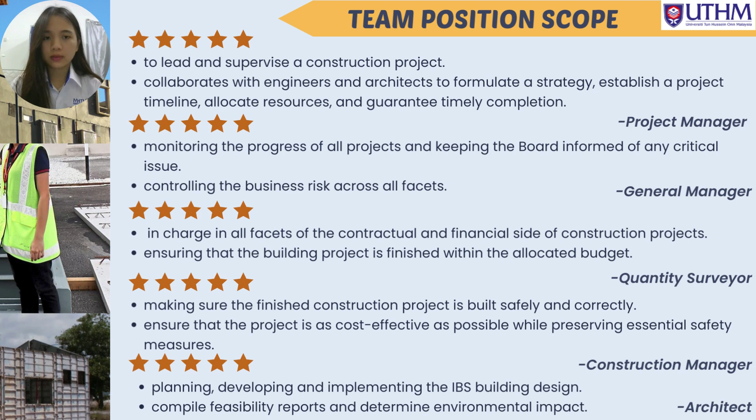He ensures that the building project is finished within the allocated budget. A construction manager makes sure the finished construction project is built safely and correctly, and also ensures that the project is as cost effective as possible while preserving essential safety measures. An architect is used for planning, developing, and implementing the IBS building design.

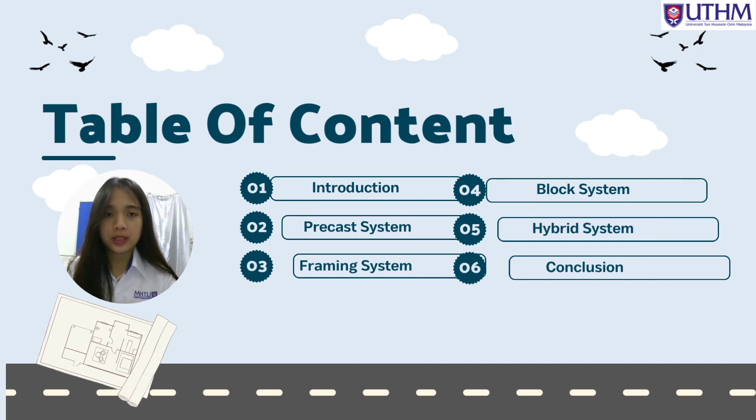For the table of contents: the first one is introduction, second is precast system, third is framing system, fourth is block system, fifth is hybrid system, and the last one is conclusion.

The IBS score is used in the construction industry to measure the level of IBS usage in a building and becomes part of the main monitoring system of the IBS construction industry. The scoring system is made according to the principle of usage of prefabricated and precast components, offsite production of components, use of standardized components, and repeatability and design of building components based on the Malaysian Standard Guide to Modular Coordination in Building, MS1064.

Next, the benefits of IBS adoption in construction activity: to reduce dependency on foreign labor, to improve construction productivity and quality, reduce wasteful construction methods, become more environmentally friendly, achieve design standards, and speed up construction time.

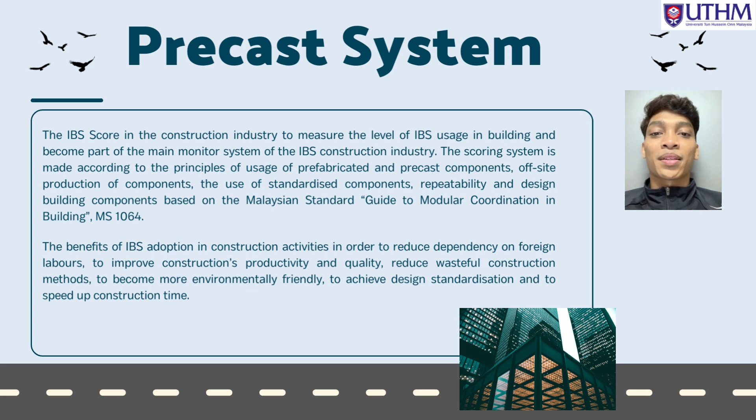Next, I will present about the installation method of the precast system. Number one is design and planning: the first step is to develop detailed design drawings and construction plans for the precast elements. Number two, fabrication: precast elements are manufactured in a precast plant or factory.

The process involves casting concrete into a mold or form, curing, and applying any required finishes or treatments. Number three is site preparation: the construction site needs to be prepared to receive the precast elements. Number four, connection and joining: once the precast elements are in place, they are connected and joined together.

Number five, finishing and sealing: after the precast elements are installed and connected, any necessary finishing touch-ups are applied. Number six, integration and completion: other construction components such as MEP—mechanical, electrical, or plumbing systems—are integrated into the precast structure.

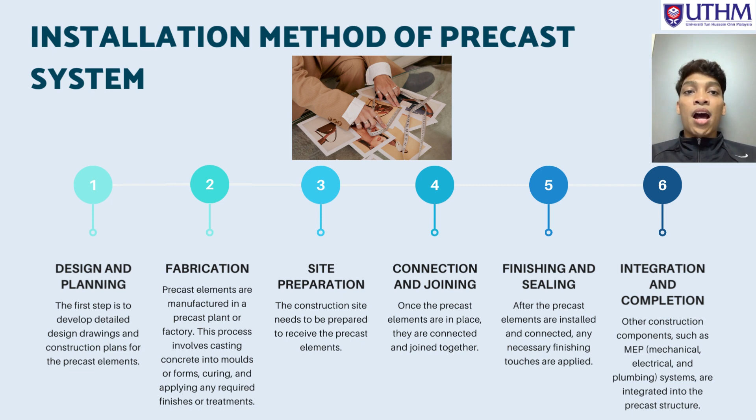Next, I will present about planning, casting, and delivery of the precast system. Number one is planning. Planning is divided into 4 items: number one is design, number two is quantity estimation, number three is scheduling.

Number four is logistics. Next, number two is casting, which is divided into 4 items: number one is mold preparation, number two is reinforcement placement, number three is concrete pouring, and number four is curing.

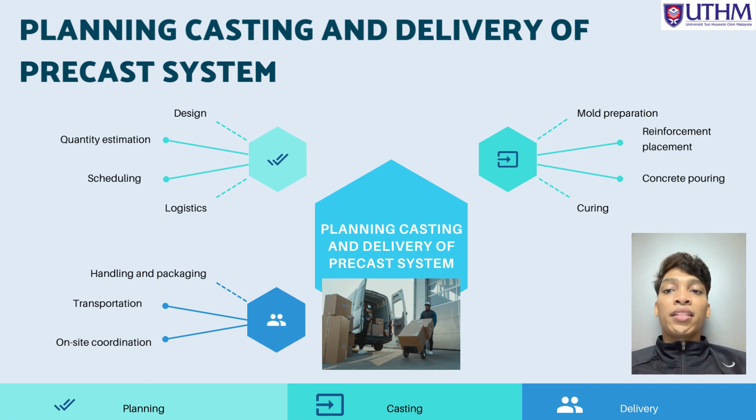Lastly, the delivery. Delivery is divided into 3: number one is handling and packaging, number two is transportation, and number three is on-site coordination.

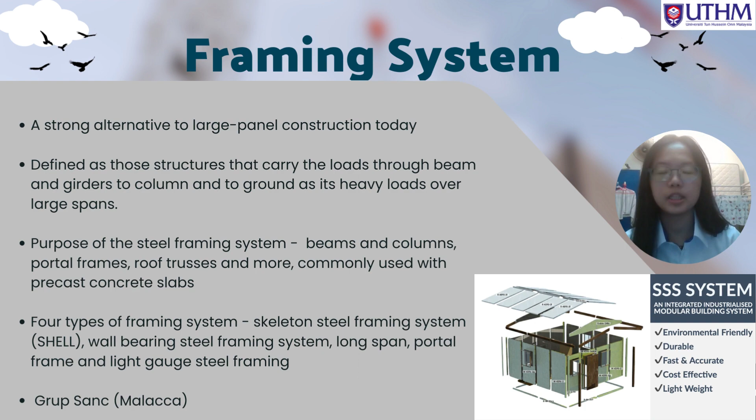The steel framing system consists of columns, beams, and floor components. In Malaysia, construction companies that use the framing system, such as Grup Sanc in Malacca, fully integrate the design and construction concept, adopting the highest standard of building quality by collaborating with international industry pioneers, which is the SSS system.

Now I will explain the installation method of the framing system. The first step is the stock yard - steel is unloaded and stored prior to being moved to the fabrication lines for processing. The second step is shot blasting.

Shot blasting is a process to displace dirt by shooting a strong force of shot onto the metal surface to provide a suitable clean finish for welding. The third step is cutting, such as circular saw, gas or flame cutting, plasma cutting, and lastly drilling and punching.

The fourth step is bending, such as section bending, plate bending, and tube bending. The fifth step is T-splitting - splitting beams to make T-sections using flame cutting. It can be cut centrally, off-center, or flange trim.

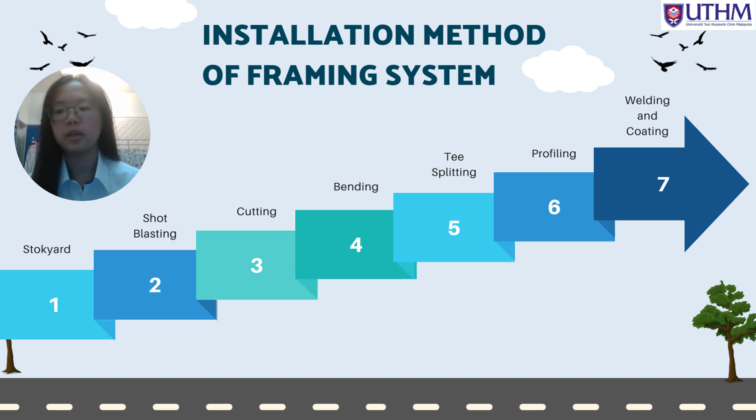Next is profiling - the tubular section may require profile shaping or saddling to fit the contour of the curved surface. The last step is welding and coating, to protect the surface from moisture which can cause it to become brittle.

And reduce its strength. Here's a table that shows the details of the installation method of the framing system, from step 1 stock yard until step 7 welding and coating.

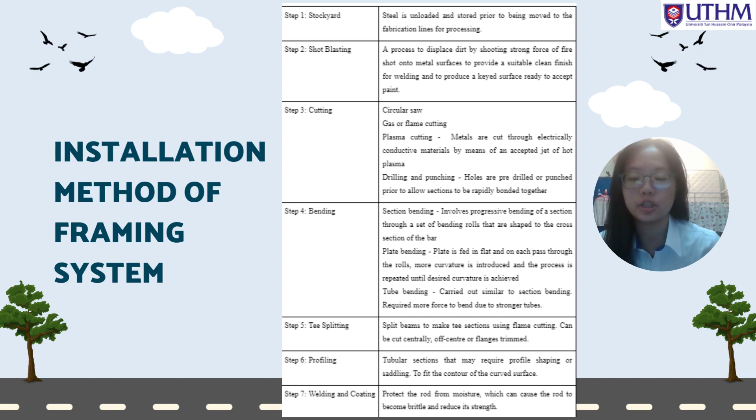The reasons for using the framing system in construction of housing units are high durability, high design versatility, and flexibility, as it can be shaped into non-conventional, innovative designs and is available in different sizes.

Now I'll talk about the planning, casting, and delivery of the framing system. First is design and engineering - we need to identify the structural requirements and load-bearing capacity of the framing system.

Apart from that, we need to do product material selection, to select the appropriate materials for the framing system considering factors such as strength, durability, and cost. Next is formwork design - we need advanced formwork systems to shape the concrete during casting.

In addition, reinforcement placement is needed to identify the reinforcement requirements according to structural calculations and the design drawing. It is also important to develop the formwork by cleaning, applying a form release agent, and installing the necessary embedded items, which is pouring and casting.

Apart from that, we also need curing and finishing to ensure the freshly cast concrete is protected from premature drying and maintains the proper moisture level for curing. Next is the step of delivery logistics, to propose the transportation logistics for delivering the framing system to the construction site.

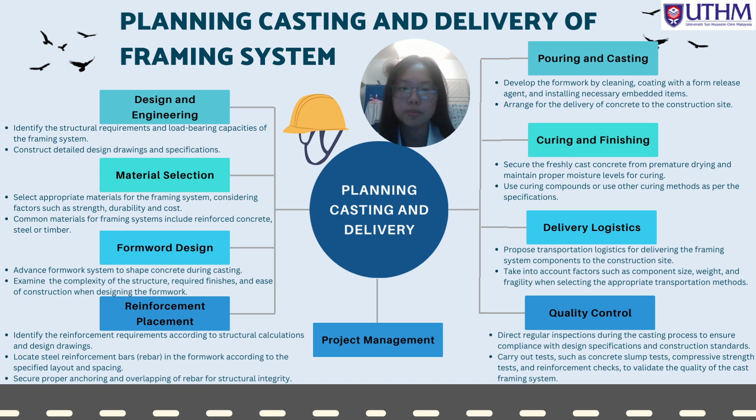After delivery logistics, we need to make sure of quality control by carrying out regular inspections during the casting process to ensure compliance with the design specifications and construction standards. And the last step is project management.

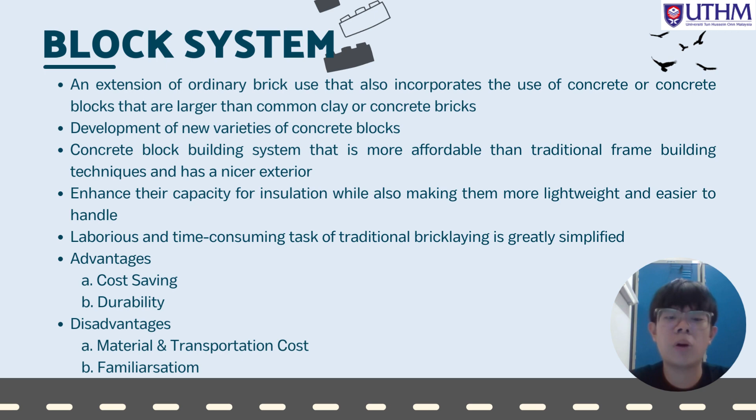The second disadvantage is the unfamiliarity with the block system. This technique is still relatively new to the construction sector, so it requires providing more employee training to learn more about the block system.

Now I will continue to discuss the installation method of the block system. First, we need to plan and design the block system based on the client's requirements.

After that, we need to outline the layout of the area. Then we need to set up a base layer for the block system and place it according to the confirmed design.

A line is then marked on a wood stick to make sure the block system is level. If the block level is low, we need to remove it and redo it with some additional mortar.

The blocks are then placed layer by layer after the first layer is done. We need to check the level of the wall after finishing the work by using a laser level.

If any support or reinforcement is required, we need to install it inside. After we complete the work, we can do some finishing procedures to meet the customer's requirements. Last but not least, we need to do quality control checks and testing to meet the necessary construction requirements.

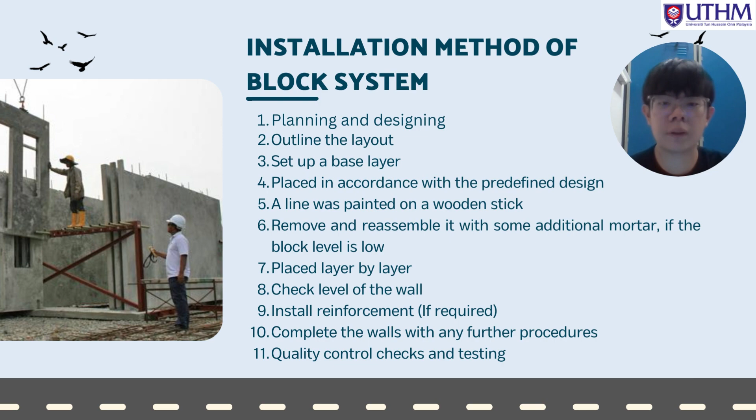For a building project to be implemented successfully, the block system must be planned, and the casting and delivery method must be determined before the project begins.

For planning, we must first know the project requirements of the client. We must always be aware of the client's requirements and understand their needs.

Second is the design of the system. We need to create a coherent design and pay attention to the size of the area used.

After we know the system we need to use, we need to estimate the quantity needed for the project. We must determine the number of blocks needed to complete the project, but we need to prepare more than the actual quantity to prevent any emergency case.

After that, we need to determine the installation method. We must select the basic technique of installation that ensures it is compatible with other construction methods. The last consideration is workforce and training.

Since the block system is still new, it requires specific knowledge and ability for installation, so the workforce must have this kind of knowledge and ability.

After that, we need to move on to casting. To prepare the material, we must measure and mix the concrete and other requirements under controlled conditions.

After that, the mold is prepared. Before pouring the concrete inside, the mold must be cleaned and inspected before production, and a mold release agent applied to make sure the concrete can be removed easily.

After that, we proceed with the casting process for the block. Techniques such as vibration or compaction ensure the mix is adequately filled, remove air pockets, and guarantee the block's structural soundness.

After that, for strength and durability, we must allow the block to cure properly. To produce the best final block, we must maintain the curing conditions such as temperature.

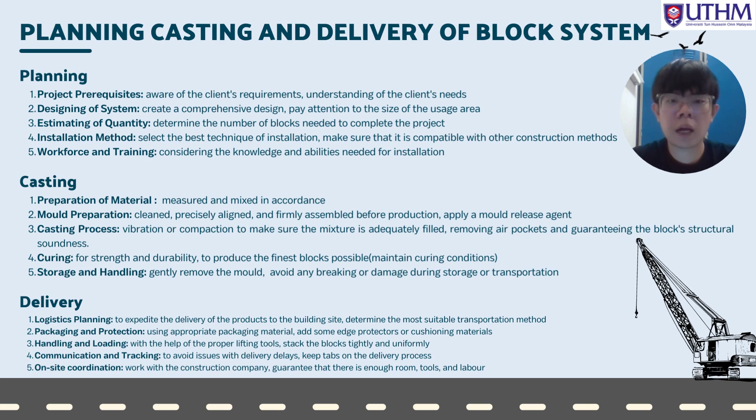Also, we need to communicate and check the delivery to avoid any issue with delayed delivery, and always keep on top of the delivery process. Last but not least, we need to work with the construction company to make sure they have enough room, tools, and labour after the block is done being delivered.

Hybrid system. A hybrid system block in the context of industrial building systems refers to the integration of multiple energy sources and technologies to optimize energy usage and efficiency.

It combines various renewable energy sources such as solar power, wind energy, or fuel cells with conventional energy sources like electricity or generators. This integration allows for the simultaneous generation, storage, and utilization of different energy types within the industrial building system. By leveraging renewable energy and optimizing energy management, a hybrid system block in IBS aims to reduce reliance on fossil fuels, enhance energy efficiency, and contribute to sustainable goals.

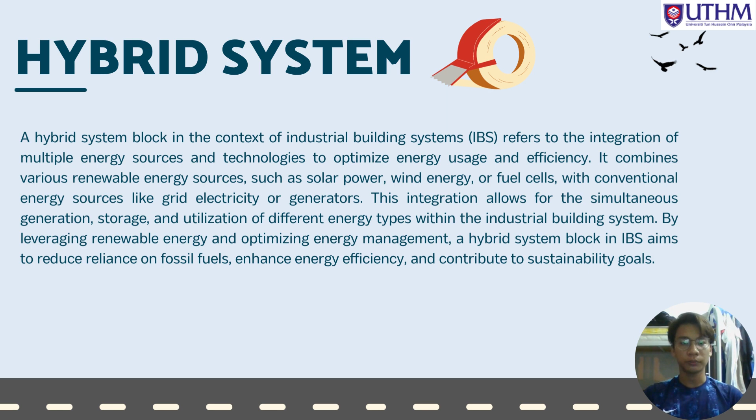Installation method of hybrid system. First, we need to consider the site preparation, which is preparing the installation site by ensuring a level and stable foundation for the hybrid block system, considering factors such as soil compaction and drainage.

Second, component assembly. Hybrid block system components include both traditional building blocks and specialized components. Third, interlocking placement, which is installing the blocks in an interlocking pattern to ensure a secure fit between the components. Pay attention to any additional features or connectors needed to integrate the renewable energy source into the block system.

Fourth, utility integration, which is integrating the renewable energy source into the block system by connecting electrical wiring, plumbing, or other necessary utilities. Fifth, alignment and labeling.

Use a level and straightedge to ensure the blocks are aligned correctly and level. Make any necessary adjustments to ensure uniformity and structural integrity.

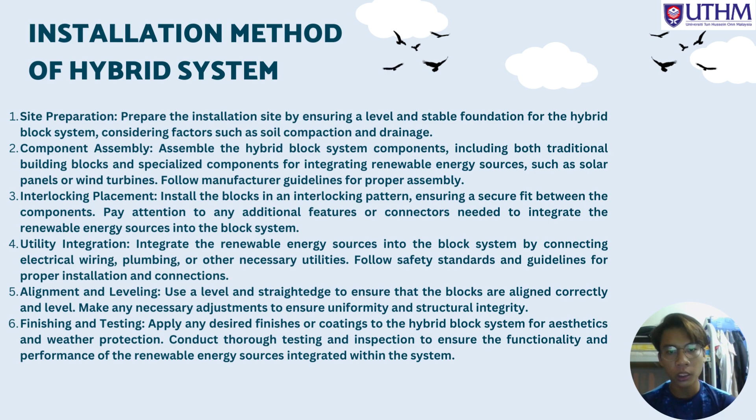And lastly, finishing and testing. Apply any desired finish or coating to the hybrid block system for aesthetic and weather protection.

Casting and delivery of block system. The casting and delivery of the block hybrid system starts with a thorough analysis of the energy requirements and specific needs of the industrial building. This includes understanding the electricity and heat demands, peak load requirements, and any environmental considerations.

The design and engineering phase begins where the specifications for the block hybrid system are developed by determining the integration of renewable energy sources like solar panels, wind turbines, or fuel cells, along with the energy storage system and control mechanism. Once the design is finalized, the necessary components are sourced, ensuring their compatibility, quality, and reliability.

If any components require casting, such as specialized structures or components for the energy generation system, a detailed production plan is created considering timelines, resource allocation, and quality control measures. During casting, stringent quality control measures are implemented to ensure the cast components meet design specifications.

Testing and validation are conducted to verify the system performance. After successful testing, the block hybrid system is delivered and installed in the industrial building, adhering to safety standards and regulations.

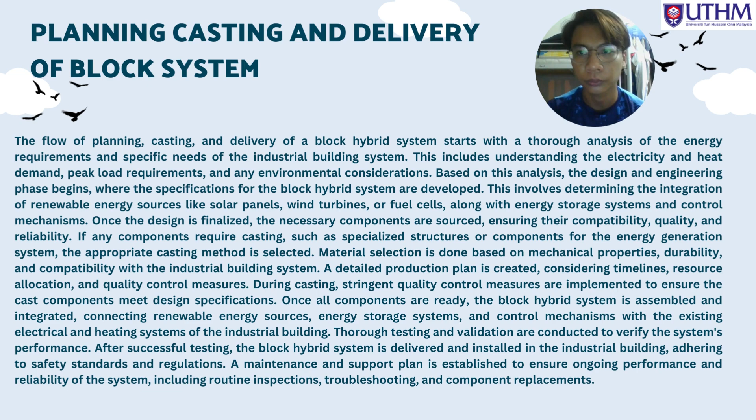In conclusion, the industrialized building system has many uses in and out of the construction industry, though most of its uses revolve around the construction industry. Take a landed property, for example. To put it simply, if the property were built using conventional techniques, every square inch would be built there and each component would need to be transported there.

The walls or stairs, for example, might be built off-site, moved to the site, and easily put together using the IBS method. Consider using Legos or building bricks to construct your own home.